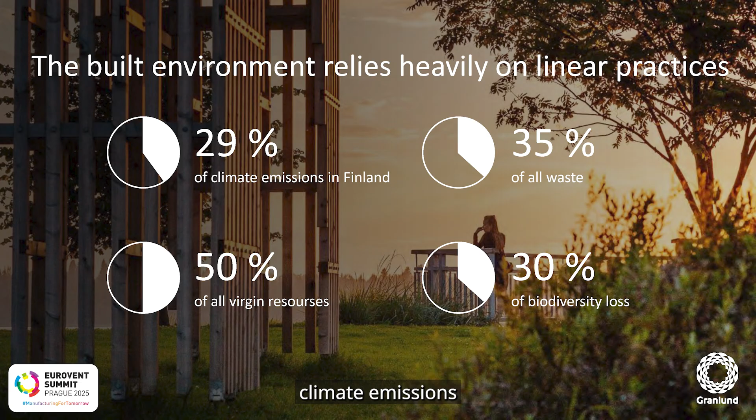So Atte was giving us a really good background of why this is important. I would like to add some figures to why the linear practices are so problematic and why EU is setting all of these targets. So the built environment still relies really heavily on linear practices. In Finland, about 1/3 of all climate emissions come from the built environment. It's about the same on the EU level. When we make, use, and waste, we're also producing 1/3 of all the waste in our country and in our region.

Construction uses about 50% of all virgin resources and causes about 1/3 of the global biodiversity loss. So these are big figures, and if we are going to tackle these environmental challenges, then construction can't stay out of it. But so why then HVAC? Atte was touching on that already. I have some similar figures from the Finnish side.

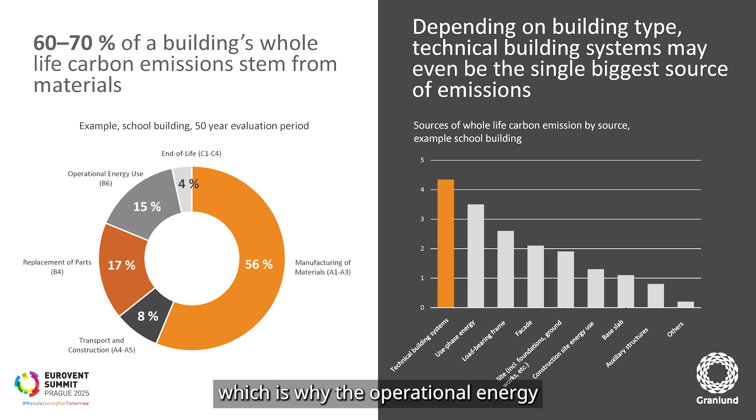So we have an energy industry that is quite decarbonized already, which is why the operational energy use, the dark gray section over here in the example diagram, is quite small. The diagram shows the climate impact of an example school building, so a new build. And as you can see, the manufacturing of materials makes up more than half of the climate impact of this building over a 50-year evaluation period.

But if we break down that orange segment, you can see it on the right, then we find that actually technical building systems are the biggest single contributor to these emissions. So that means, of course, also the building owners, the ones commissioning these construction projects, they've seen these figures too, right? And they need to lower their climate impact because starting from the beginning of next year in Finland, we will have whole life carbon limit values on construction. On an EU level, that will be the reality starting 2030, so it's not that far away.

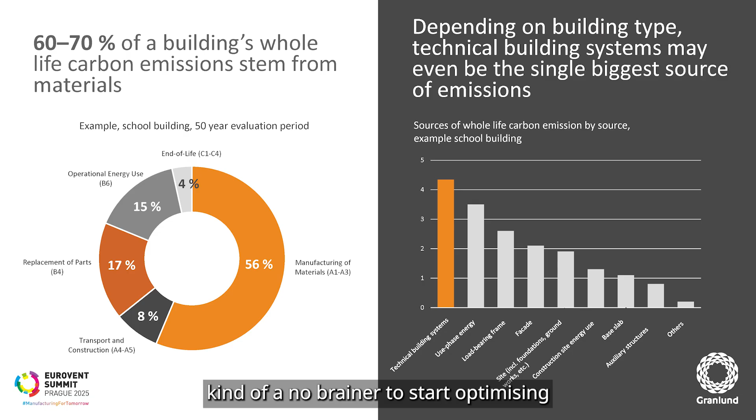So I'm bringing you sort of insights from the future because we're already working with that on our building projects. And it means that when we have a limit under which we need to stay with the whole life carbon, and we look at where the contribution comes from, and we see these diagrams, then it becomes kind of a no-brainer to start optimizing the HVAC systems. And technical building systems in general. Lighting is a big contributor as well.

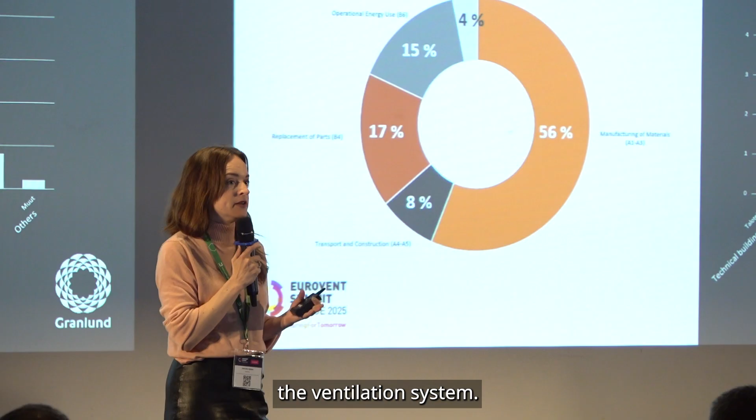And when we start doing that, of course, choosing products with a lower environmental impact is one key solution. The environmental product declarations become really important so we can compare different products. When making purchases, the companies will be comparing. There might be a limit set for, for example, the ventilation system. The project might have a cap for how much the overall climate impact of the ventilation system can be. And then we start optimizing products within that system.

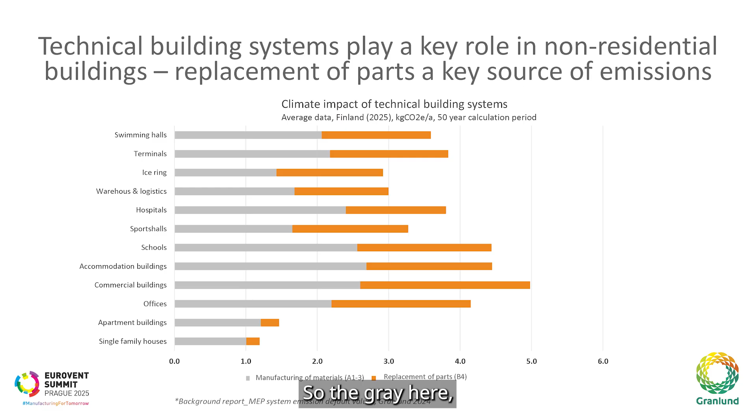But reuse is also a really central strategy. And part of why reuse is also interesting is when we look at where the impact over the 50-year lifespan comes from. So the gray here is the impact that comes up front when we build the building. And the orange bars indicate the impact during the lifespan, so when we're replacing parts during the lifespan. And if we look at non-residential building types, then the replacement of parts is actually a huge chunk.

Partly it's because those parts wear out, but partly it's also because there might be tenants moving in, tenants moving out. It's not necessarily that the part itself isn't servicing anymore. It might just be that the use is changing. And the traditional way has been to gut everything and put everything new in, but that's not going to fly anymore.

Of course, decarbonization isn't the only incentive for reuse. Atte was in on that as well. I'm not going to go too deeply into it because we don't really have time, but of course corporate strategies play in. We have property owners who have really ambitious climate targets. They can't keep doing things the way they've been doing it.

So in Finland, what we did was we had a joint project where we tried to explore the refurbishment and reuse possibilities and identify what the bottlenecks are. Because if there's something we know about circularity, it is that nobody can do it alone. The product manufacturer can't do it alone, the property owner can't do it alone, the contractor can't do it alone, the designers certainly can't do it on their own.

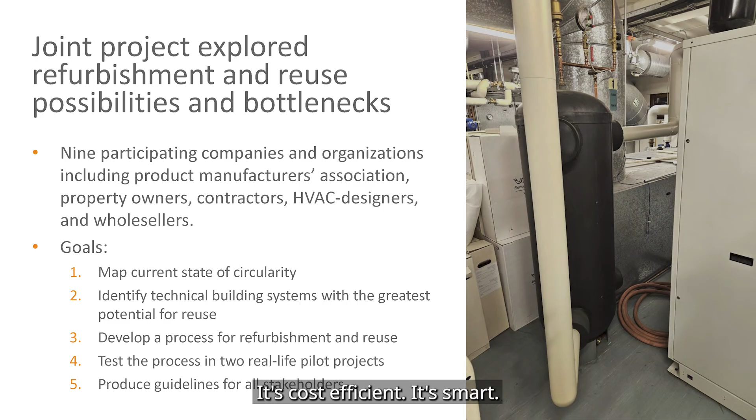And then we wanted to test the process in some real life pilots, and then produce guidelines for all the stakeholders. So we also wanted to document what went wrong, what could have been done better, how it should be done, so that people could learn from our mistakes. So this is a picture from one of our pilots.

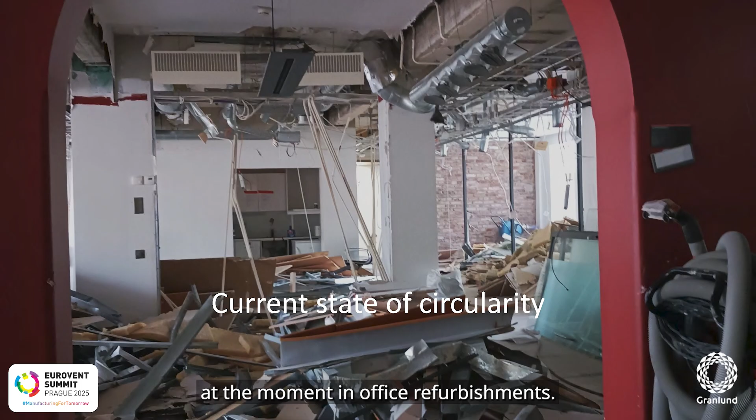This is the state of circularity at the moment in office refurbishments a lot of the time. The contractor comes in and sort of smashes everything up, throws it away, and puts in some new stuff. But this obviously is not how it should be if we're going to be circular.

So the challenges, on the one hand, as we have been touching on before, product development is quite rapid. So while we want to lower embodied carbon, we also want to have energy efficiency. How do we marry those two? Contractors' revenue models are often based on getting a commission of the new products that they bring in. That is a challenge. Inadequate data flow is a huge problem.

So if we don't know what products we have in the building, we don't know their properties, how are we going to know whether they're fit for reuse? And also a low awareness of possibilities. We might have a product manufacturer that's very interested, and a client that's very interested, and a designer that's very interested, but they're not talking to each other. Nobody's saying, we want to develop this further, will you come and do it with us? But everybody needs each other.

There isn't a good marketplace where these products could be exchanged the way that new products are. Although we're finding that in Finland, for example, some of the wholesalers are very interested in having like a second-hand line of offerings. So that's also something that might be in the works in the coming years. And then, of course, there's legislation, for example, on refrigerants and liability and warranty issues, which are no small questions.

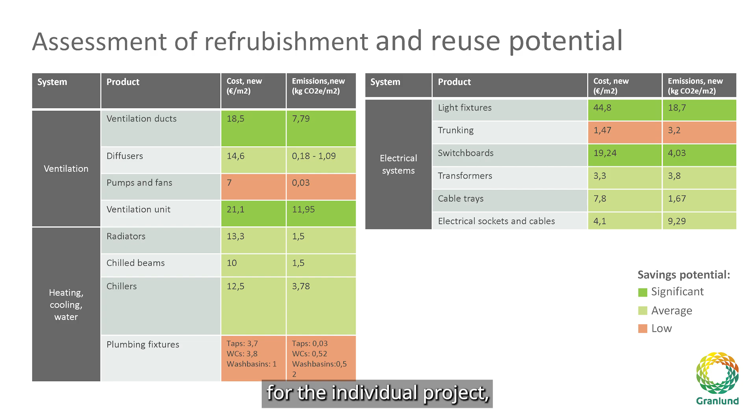But so what we did is we assessed the refurbishment and reuse potential of different parts. So the criteria here for us were if it has high embodied emissions or a high cost, then it might be worth putting some effort into getting it reused. That doesn't mean that the ones marked in red shouldn't be reused if that works for the individual project. That's up to them. But especially if your product as a manufacturer is marked in dark green, then it probably means that there's some potential there for you.

So what we did in our pilots was both dismantling and reinstallation. But I'm going to especially take a look at the dismantling here because that is quite interesting, and I think in the dismantling is perhaps where the product manufacturer can play a significant role. Because if the product is dismantled intact, delivered, for example, back to the manufacturer, you can refurbish it, you can sell it. After that, actually the assembly process for using it again doesn't really differ much from using a new product.

So of course, at first we had to evaluate the reuse potential. This is where the data flow problem comes up. We had to assess what was already in the building. Ideally, we would have this information already in digital form, maybe in a digital twin, but at least for these buildings, we did not.

So the designers had to dig through previous documentation, PDFs, paper documents, and try to find what models did we have from what year, how had they been maintained, and that took a lot of time. Once the reuse potential had been evaluated, we went back to the client and we said, look, we think these and these parts could be reused. What do you think? This is approximately the amount of effort it would take for each individual part. And the clients then went over the list and we made a plan.

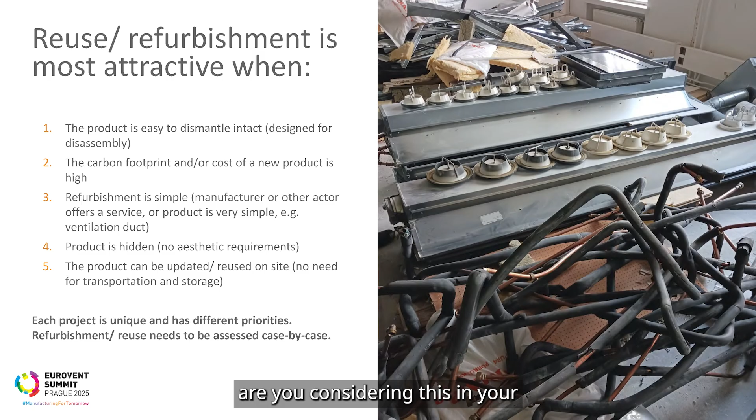As our findings, we found that reuse or refurbishment is most attractive, obviously, when the product is easy to dismantle intact. This is also a pro tip to you manufacturers. Are you considering this in your product design? Also, as I mentioned before, if there's a high carbon footprint or a high cost, it's worth considering reuse and refurbishment models. When refurbishment is simple, so either the manufacturer is involved or it's just technically very simple, so anybody can do it. If your product is hidden, so there's no aesthetic requirements, it doesn't matter if it's a little bit old looking, then that really helps. Or if the product can be updated or reused on site. So maybe you can just change a fan, change a filter, change something small, and it works without having to ship it anywhere.

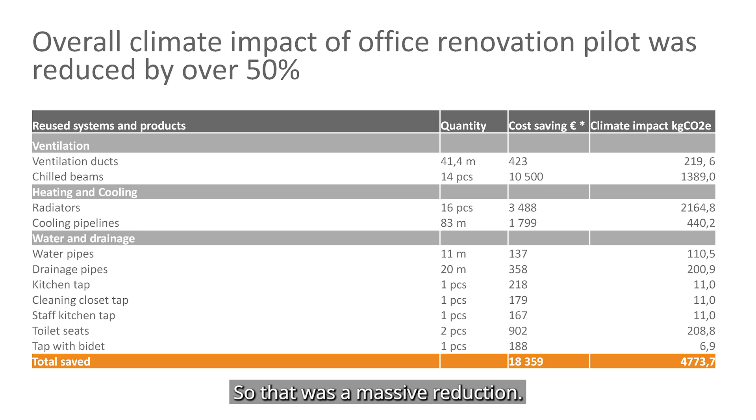Just briefly before I finish, the overall climate impact of our office renovation pilot was actually reduced by over 50%. So that was a massive reduction. This was a very small renovation. It was only about 400 square meters that was renovated. But this reduction was really huge. And so the property owner that was involved was very much motivated to keep pursuing this in the future. And yeah, circular business models don't need to be just selling old equipment back. There's lots of models, and many manufacturers are doing them already to some extent. So you just need to find what works for you.